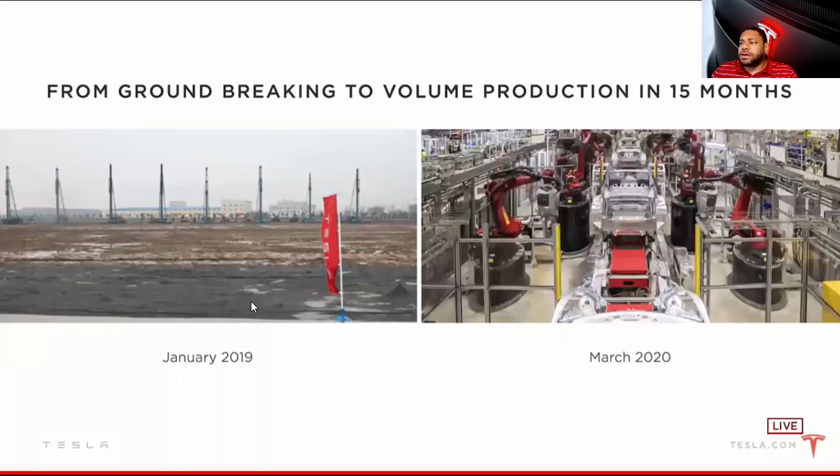After that, a couple other people spoke, but then Elon came up and quickly shared how Shanghai went from basically breaking ground in January 2019 to actually producing in March 2020 - breaking ground to volume production in 15 months, which is incredible and amazing, almost never been done within the last 100 years. So that's incredible, focusing mostly on the volume production of Model Y.

He also talked about how they introduced the cheapest solar in the US, only $1.49 per watt for solar on existing roofs - that's pretty incredible. And he talked about 4 consecutive quarters of GAAP profitability, which is definitely crucial. Definitely do research on companies and what it means for their profitability - again, consistent, consecutive. Then also consistent free cash flow generation starting most likely from Q1 2019.

And I mean, they're going to continue to rock and roll. Long story short, it's been incredible. The turnaround they've been able to make from 2017 to 2019, and now 2019 charging into 2021.

One of the things Elon shared is that there's a factory on each continent. That's a huge benefit on distribution. I talked about it in my other video on why Tesla is a damn good investment. Distribution, different places to get a Tesla, cuts down on the cost.

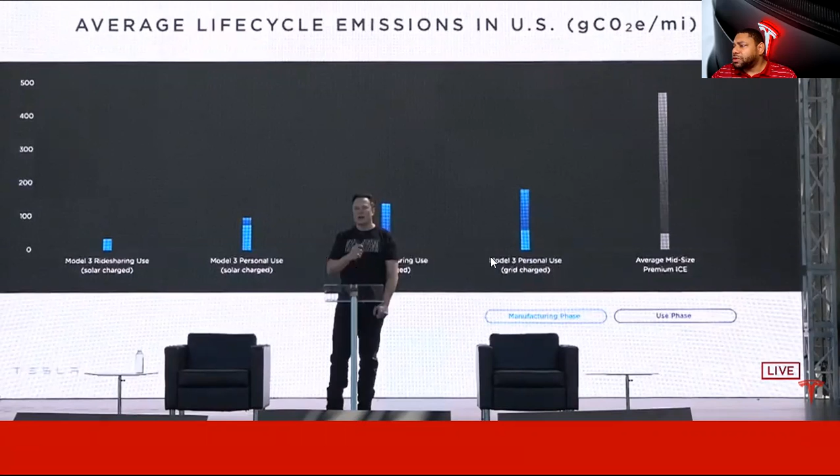The average life cycle of emissions in the U.S. is still pretty high when it comes to the average mid-size vehicle. But when they looked at the Model 3, it definitely made a difference. And safety...

This is one thing I've shared with other people as well. Somebody asked me about the safety of a Tesla and the autopilot and all that stuff. I kind of wish they wouldn't use the word autopilot, but even if you're a pilot in an airplane, you put it on autopilot, you still have pilots. So it's not 100%, but they say fully autonomous and things like that. I don't know, I'm still iffy about that.

The thing is, we hear about Tesla more in the news whenever there's a Tesla accident, a Tesla fender bender, whatever, because of the impact Tesla is making in the industry. We don't hear about all the accidents with a Toyota Corolla, a Lexus, or a BMW. They definitely exist, they definitely occur, they definitely happen. We don't hear about the accidents of a Cadillac Escalade or any car. But let a Tesla have an accident and we hear about it, people taking videos of it, pictures of it. But with all that, still...

There's being able to receive a huge amount of safety acknowledgement, safety awards. It's kind of interesting which ones they pick, like U.S., European, Australian Insurance Institute for Highway Safety. Overall, they've been doing pretty well with safety, so that's a huge bonus.

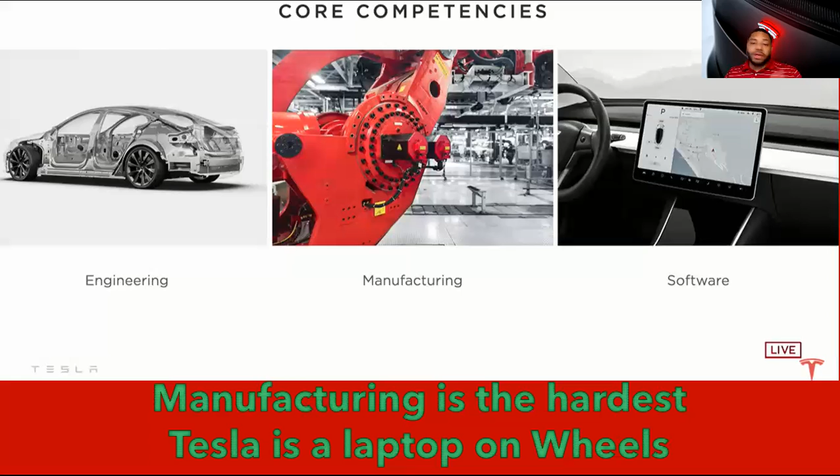So that's why when creating new manufacturing, you have to create new software. A lot of stuff was rewritten, redone, which is incredible. And of course, again, the three different factories, the Shanghai Phase Two, I think this is Berlin.

I'm not sure, and then also the Texas Gigafactory too. He also talked about how the launch mega pack, which is a 3 megawatt-hour, all-inclusive, all-in-one energy storage solution, continues to really focus on harnessing the energy.

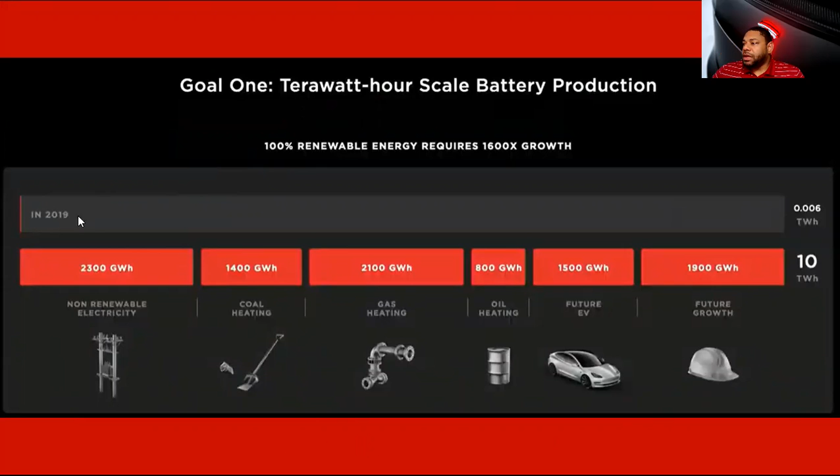And this is one of the things they had. Let me go back. Yeah, so goal 1 is to actually create a terawatt-hour scale battery production, and this is how they plan on utilizing quite a few different things. But then the thing that was really impressive to me was right now in the Gigafactory.

So for example, when they finally get the Gigafactory up and going in Texas, it's basically going to be about 0.15 terawatt-hours. They'll be able to produce certain things in a certain amount of time. Investment in material, cell, and battery manufacturer is about $2 trillion, so there's a lot of money. And they can't get it fast enough. Even when they increase the capacity, it's still not enough, because we can do 20 terawatt-hours, but that's going to take at least 135 Gigafactories. So the challenge is to make the factories more efficient, smaller, more profitable, all these different things, so they can actually achieve the 1 terawatt-hour factory.

But that's the problem. Goal 2 is that the EV market share is growing, but EVs still aren't accessible to everybody. I think they said right now only like 1% of the vehicles in the world are electric, or maybe that's partial electric or totally electric, I'm not sure. But the percentage is increasing, and a lot of people still don't have them. I think it's right around 1.7% of the EV market share.

And they do this with the factories, but then they also do it with the batteries. So with the factories, they are building from the ground up. That's one of the reasons why they do that. Some people have asked, why can't you just go somewhere that already has a bunch of factories and just redo and remake the factory, recalibrate it, refit it, put new stuff in there? Like, nope, we want to start from the ground up, so that way we can create it the way we want it. That's one of the reasons why they do that. It's part of their business model.

Let's get into it. So the typical battery, most people understand what a battery is because they've had one or seen one. It's a positive and then the negative. That's simple. Now these are important: the anode, the cathode, separator. The anode is the positive end, the cathode is the negative end, but it's connected. The separator keeps everything separated within.

So now what they're planning on looking at is changing the size of the battery, changing the height as well as the energy that can be stored in it. So 18650 is just the diameter and the height of the battery, and that was back in '08.

Now currently they start using the 2170, which started in 2017. Again, it's diameter and the height. And basically that created energy 50% better than the original batteries.

Now the thing is, if they do go with a bigger cylinder, the bigger cylinder sells for less, so that's one of the great things about a bigger cylinder. But now the issue with the big cell is that it's more challenging to charge, so you most likely won't have a supercharged big battery. But what they plan on doing is actually creating a new type of cell and decreasing that cost exponentially. This is one of the huge aspects of battery day right here.

Supercharged time increase goes down drastically. They talked about how one reason the charge time is really high is because it takes a lot of energy to recharge one of these, and because they have tabs. Well, the new style will not have tabs. The new style of battery they plan on designing will not have tabs.

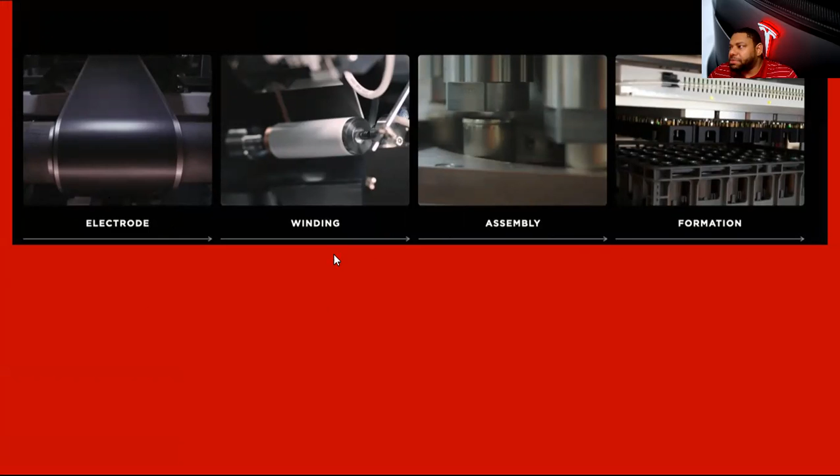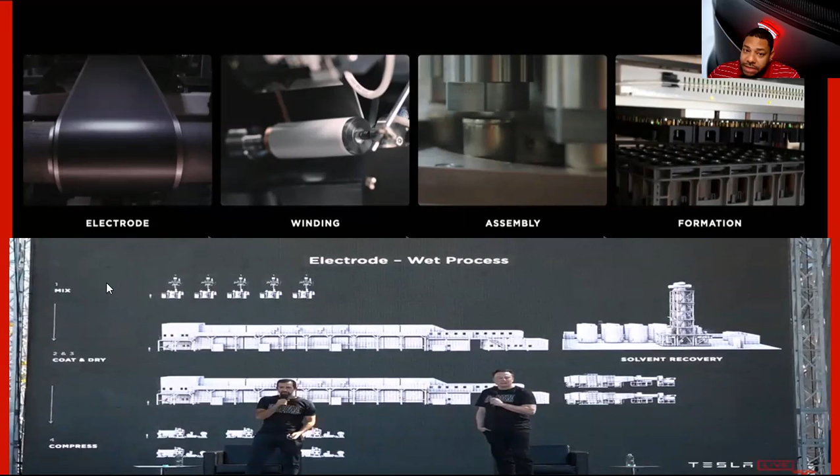So then they went into the cell factory, because the factory itself is pretty challenging on how to create these type of batteries. You have the electrode, then you have it wound up, then you have the assembly portion, putting the top on it, and then the formation. So this process is actually pretty long. There's a huge amount of chemistry, electrical engineering, chemical engineering, civil engineering - a huge amount of different types of engineering that goes into this.

If you could imagine going through phase one, then phase two, then three, then phase four, then phase five - it's a huge amount of back and forth. I remember learning that the more times you touch a product, the more expensive it becomes. So what they're doing is what we call in the industry lean engineering, or Six Sigma - reducing waste, all these fancy terms. Shout out to everybody that's a green belt in Six Sigma.

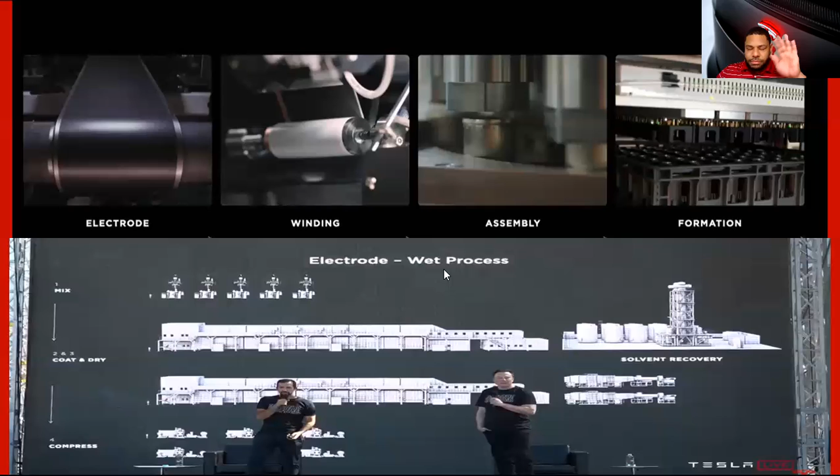What they're doing is, instead of having what we call an electrode with the wet process - I actually have a minor in chemistry, so I understand what they're talking about, and even dabbled with chemical engineering for a while, but I don't want to bore you all with this. You all want to figure out, is this still a good investment or not? It is, trust me. The wet process is actually turning into a dry process. The less you have to touch a product, the better you can do.

So you start with a dry electrode, mix it, and then create the dry coat - 10 times the footprint reduction. Again, you're touching it 10 times less - imagine that, touching something 10 times less. But it also creates 10 times energy reduction, so again, touching something 10 times less, and you spend less energy trying to create that as well.

So that's what this is for dry electrode.

Also within this facility, they talked about high-speed continuous motion assembly. Right now they can create one assembly line instead of all those different back and forth lines. They'll create one assembly line developing 20 gigawatts per hour and have 7 times the line output. That is major. When you reduce the number of assembly lines, you only need one assembly line to do the same amount of work as multiple assembly lines.

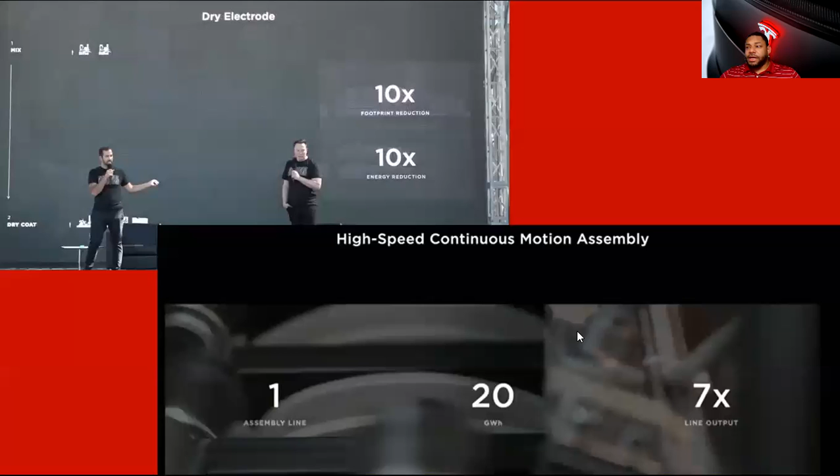So what does that look like? Well, it looks like an 86% reduction in formation investment. That means you have to invest less in your facilities to get the same output, and 75% less formation footprint as well. In 2018, the Gigafactory produces 150 gigawatts. A Terafactory would actually be smaller and produce more energy, 10 times smaller footprint per gigawatt hour. So the terafactories are going to be smaller than the current gigafactories.

So the future factories - again, those who are city planners, mayors, governors trying to get new industries into your state - if you figure out you got some land or some place that is good for Tesla, I'm telling y'all may want to check them out. And hopefully other car industries, other car manufacturers are following this.

Tesla actually shared - I don't fully understand this part - but he said he made the patents available for people to examine, to look at, to understand, and he's encouraging manufacturers like, hey, this is what y'all probably want to do if y'all want to stay competitive. If y'all want to be able to compete with me, these are some of the changes y'all might want to make. If y'all don't want to do them, okay, fine.

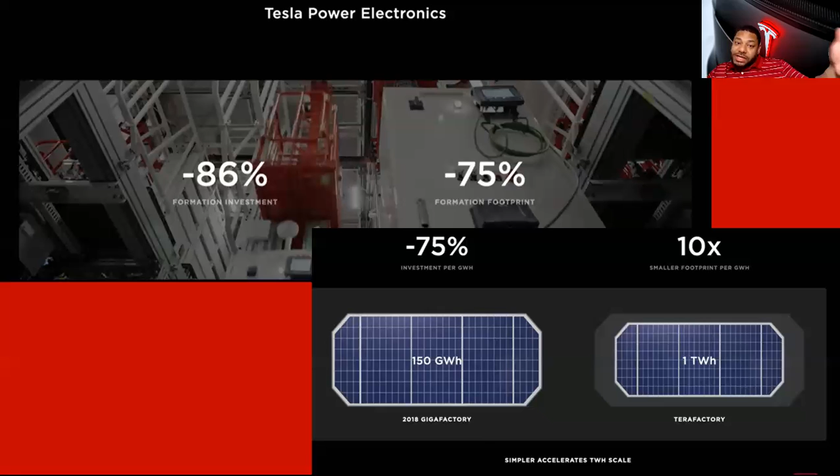So again, the plan is to not just have 100 gigawatt hour plants in 2022 to get the gigawatt factories to 100 gigawatts per hour, and then to get the plants to 3 terawatts per hour by 2030. 3 terawatt per hour factories by 2030, okay?

So after the battery itself and the cell and the cell factory, now we had a 32% per kilowatt hour reduction. So now we go to the anode material.

This is one of my favorite parts because it's all about the chemistry of it. The most abundant element in the crust after oxygen - guess what it is? It's silicon. And silicon stores 9 times more lithium than graphite. So the crust is full of silicon. We don't have to worry about running out of it anytime soon. I don't know exactly how much is in the ground, I'm not sure, but it's a huge amount.

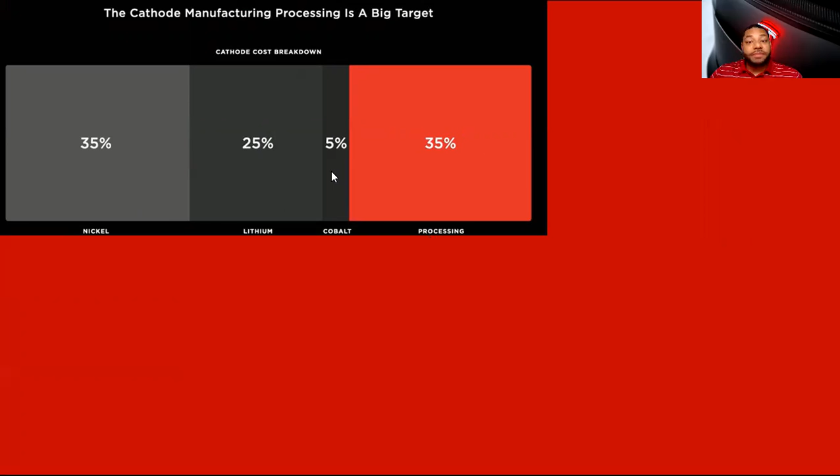So right now, the manufacturing process is a big target. So now, as you see right now, they're doing 35% nickel, 25% lithium, 5% cobalt, but the processing of all that is 35%.

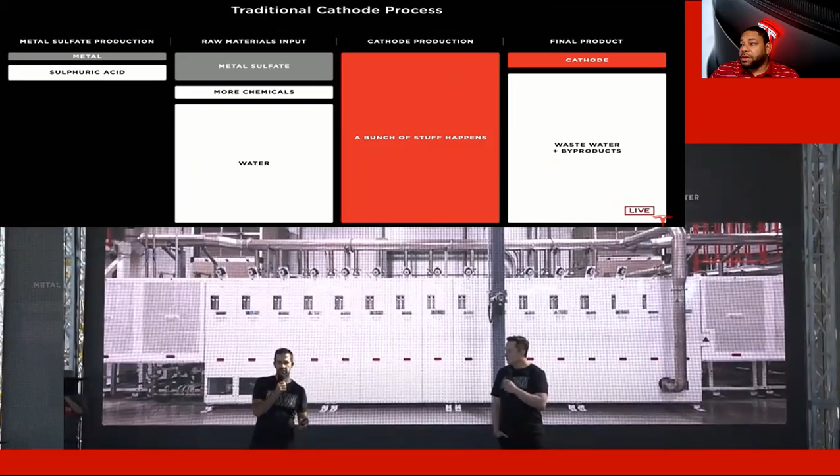Incredible. I'm not sure if people understand it or not. No, we shall see. And then they even said the factories will be better for it too.

All right, so then directly consuming nickel powder simplifies metal refining and recycling, because right now there's a nice amount of waste.

They do a pretty good job, right? And they do plan on having places where batteries can be recycled with little to no harm on the environment. So sustainably mined sourced ores, optimized refining, and recycled batteries. They talked about that.

Eliminates billions in battery grade nickel production, so that's another great thing. And they said some of the batteries that will last for at least 10 years will begin to need to be traded out. So they'll figure it out.

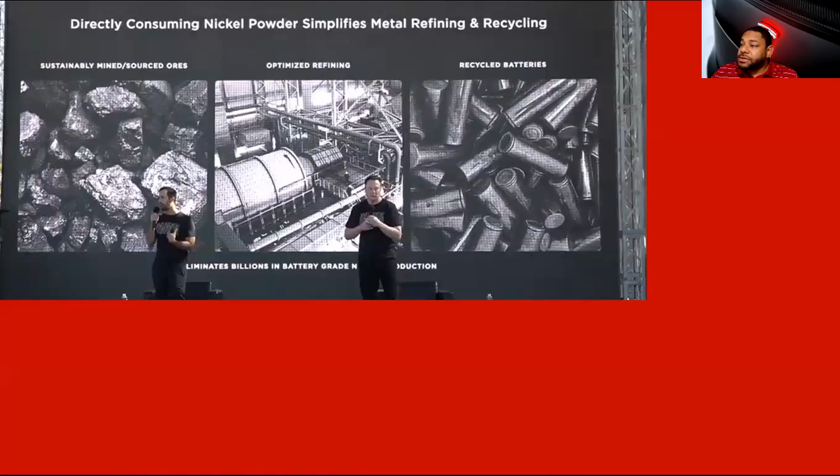Like I said, they talked about having lithium clays in Nevada. They plan on having a Tesla cathode... cathode, I don't know why I keep saying the wrong cathode.

I forgot where they said they're making it at, but they'll have a factory just for that, and it's continuing to receive nickel and lithium from different places.

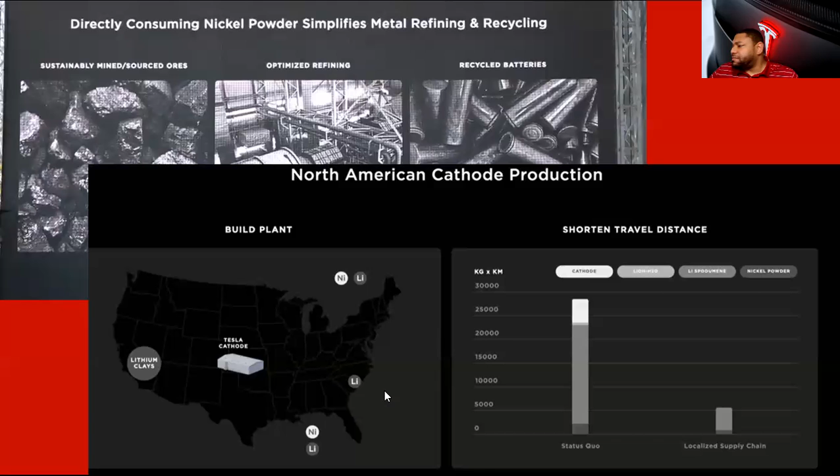But again, it takes a lot to ship those different things from different places from here to there. So they actually will be working towards having the Tesla lithium and cathode places right next to each other.

They plan on getting the lithium clays directly from Nevada, and minimizing where they get some other stuff. So a reduction in lithium costs will be down by 33%, and the factories will be 100% electric facilities.

So that's another great thing. And again, it talked about getting lithium.

Lithium is apparently easy to get. There's actually enough lithium in Nevada to electrify the entire U.S. fleet. I'm not sure what mining facility or who will be responsible for this, but I'll definitely be looking into it, investigating, and might even invest. The lithium mines in Nevada, they just got those, and they'll be doing the processing there. So instead of having to transport raw materials, they just take it right there and have it placed.

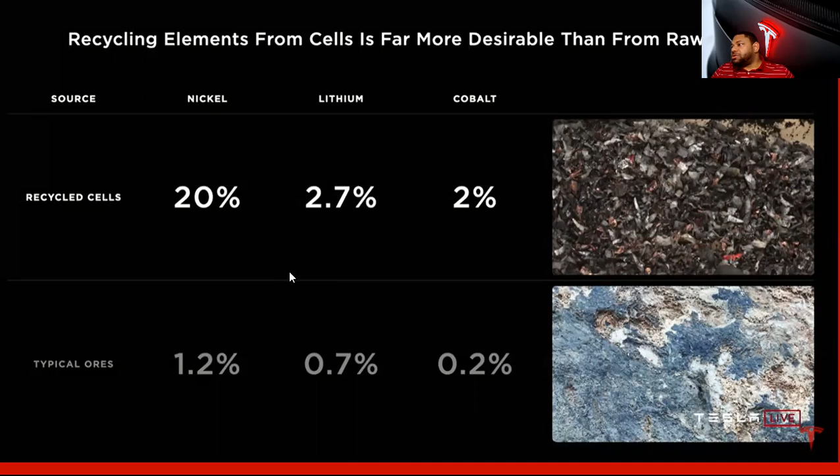So again, just a great reduction on everything. Recycling resource is 10 years delayed, so in 2025 batteries become available for recycling. Because they started in 2015, they're going to start recycling batteries in 2025. They had to make sure they figured that out. And with that, right now we have a 49% kilowatt hour per unit reduction, saving a huge amount of money and cost.

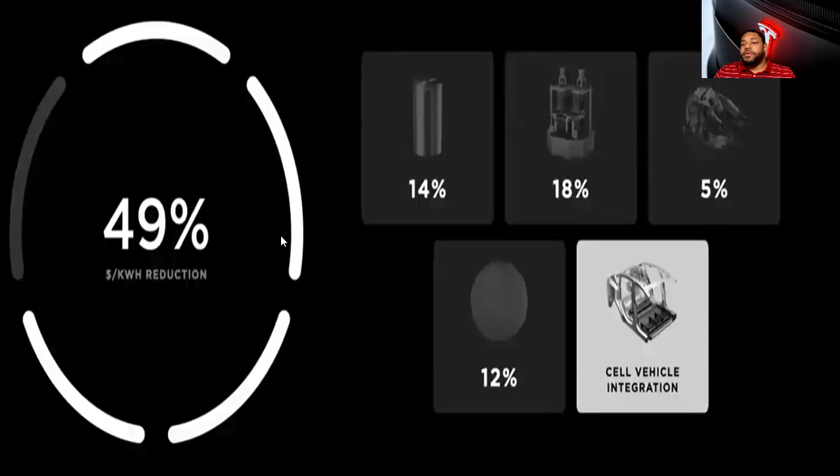Now one of the other big things is the casting. A lot of people already talked about the casting already — right now the Model Y giga casting. The challenge is you have to create the machine to make the cast first. That's why manufacturing is really hard, you've got to get that really right.

Right now they're mostly doing the rear underbody with a cast. When you do a cast, it's way less pieces and you can get it done quicker. It actually reduced 79 parts per car. That's huge — if you think about every single piece of a car, and you reduce that by 79 pieces, you're able to produce cars faster and get them out faster.

They also created a new alloy, with no heat treating or coatings needed. I'm not going to go into too much detail because I would definitely geek out on this stuff.

But long story short, imagine a muffin pan, or in cooking shows when somebody puts too much batter in one of the muffin holders and it cools off too soon, or it's too thick. That's some of the huge challenges with casting. If you want your alloy thick in one area but thin in another, that's really tricky. That's why they had to create a new alloy. That's incredible, that's phenomenal.

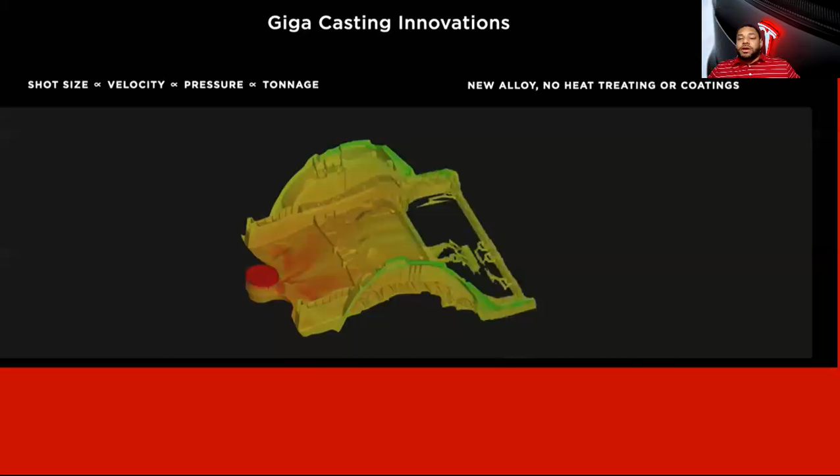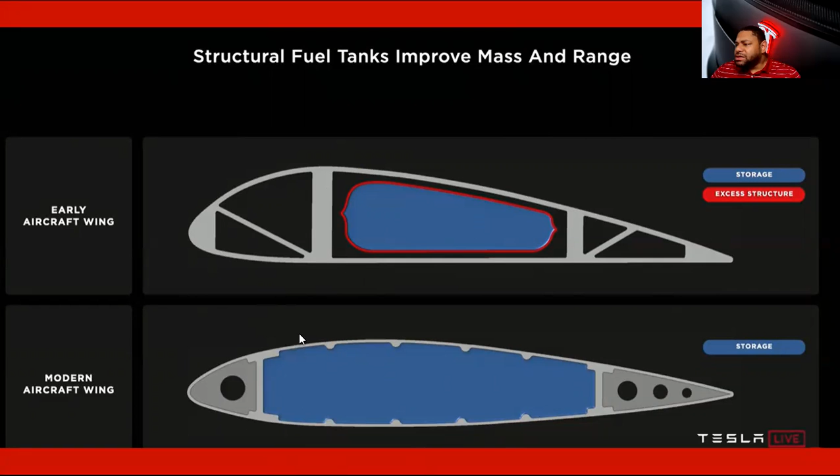One of the other aspects is they looked at how original airplanes had an aircraft wing that was partially storage, with excess structure just sitting there. Somebody came along and said, why don't we just create the storage the size and shape of the wing, instead of creating storage and having leftover space? So that's what they did with batteries — the battery should actually be part of the structure, providing storage. Structural batteries improve mass and range.

This means a revolution in body plus battery engineering: 10% mass reduction, making the car lighter, 14% range increase, and 370 fewer parts. Again, the more you touch something, the more expensive it is; the less you touch something, the less expensive it is. This is a lean engineer's, Six Sigma, everybody's wildest dream right now.

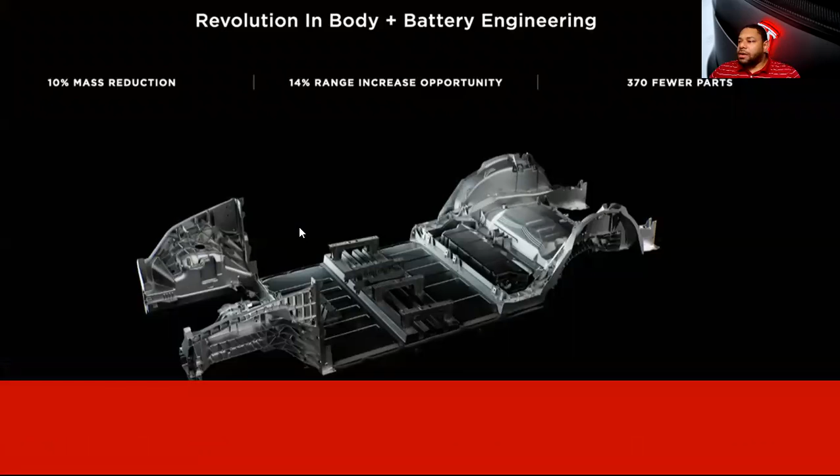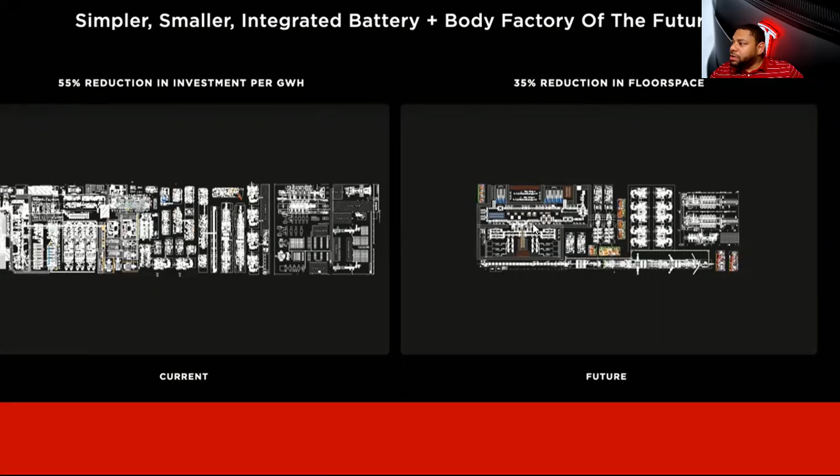Being able to create a cast where you eliminate a lot of these different things will be way better — simpler, smaller, integrated battery plus body factory of the future. A gigawatt hour sees a 55% reduction in investment per gigawatt hour, and 35% reduction in floor space. Smaller but more powerful, leading to a 56% kilowatt per hour reduction. That's incredible, a huge amount of savings in development.

Now the challenge is, and this is what people probably also don't like — I mean, they were being honest.

They were like, hey, this is some of the things we're already in the midst of doing. Other things will take maybe a year and a half, 18 months, and for us to really recognize the benefit and the cost, it might even be 2-3 years. So don't get overly excited. This will take time, it will take investments, it will take messing up but figuring things out.

But the range will increase. The kilowatt reduction will continue, and the investment per gigawatt reduction is 69%, which means they're saving more money so they can invest back into the company. So our investments actually will be better too.

Again, this is phenomenal for those who are deciding to be long-term investors. If you're trying to trade this quick, fast, and in a hurry, I don't know what's going to happen.